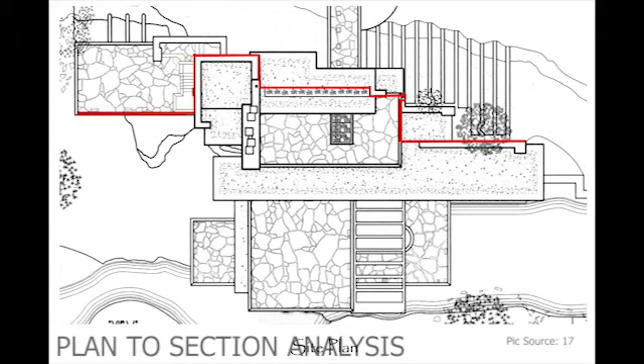While Fallingwater emanates a sense of simplicity through its clean rectangular geometries, deeper architectural analysis reveals the immense complexities that underlie the building's design. Wright employed a variety of formal techniques to create an aspect of discipline within his design and define the unique style that shaped the development of modern architecture.

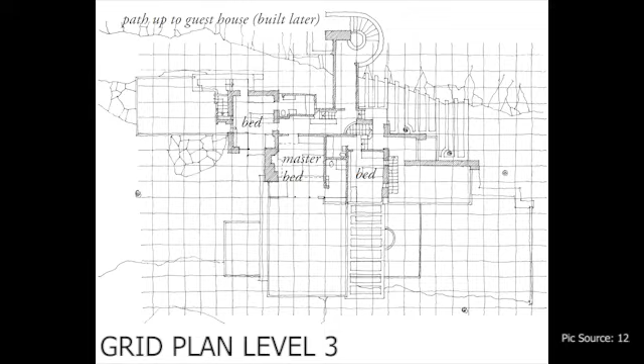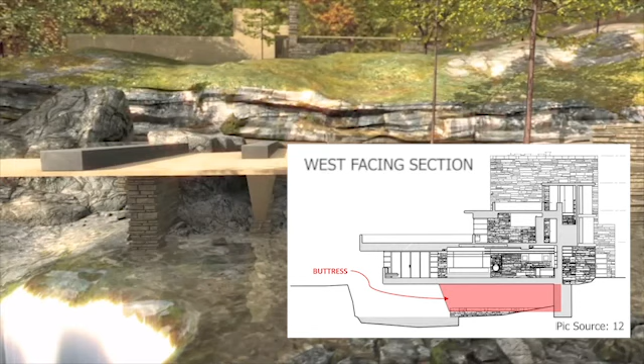The plan is governed by a regular grid, 5 foot by 5 foot, which is oriented to the existing bridge on the site. From a structural perspective, the foundations of the building were formed into the rock ledge beside the River Bear Run, using a combination of locally sourced stone and concrete. To provide the strength required to support the large cantilever overhang of the first and second level balconies, Wright designed 3 large buttress foundations made of reinforced concrete.

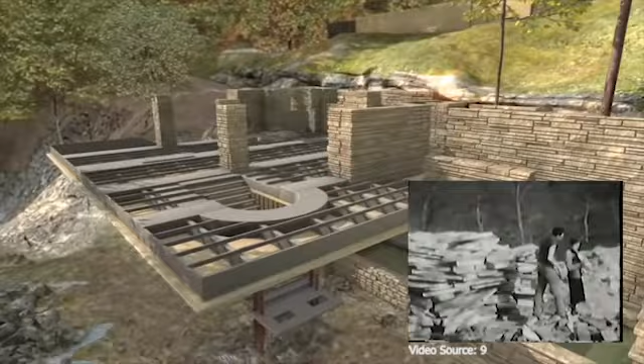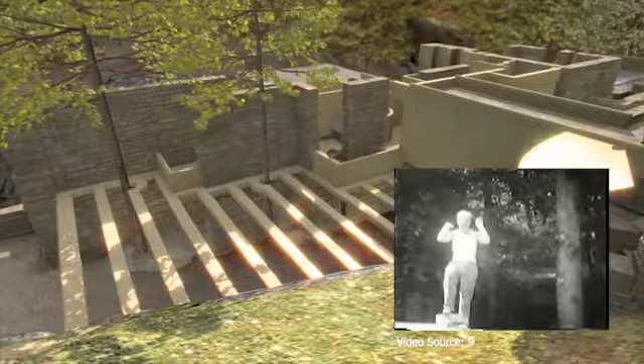The core walls of the building were constructed using the same stone as the foundations, which was sourced from a nearby quarry. The construction of this ambitious design was certainly not simple. The local workers had to be trained how to construct the formwork and concrete reinforcement with a level of precision previously unmatched. The daring cantilever design caused much conflict between Wright, the client, and the contractor, and ultimately resulted in a construction timeline of almost 3 years.

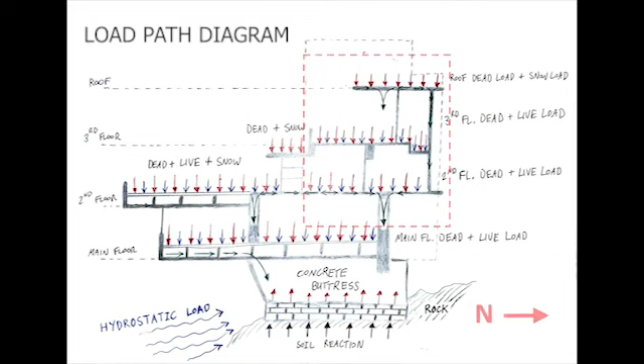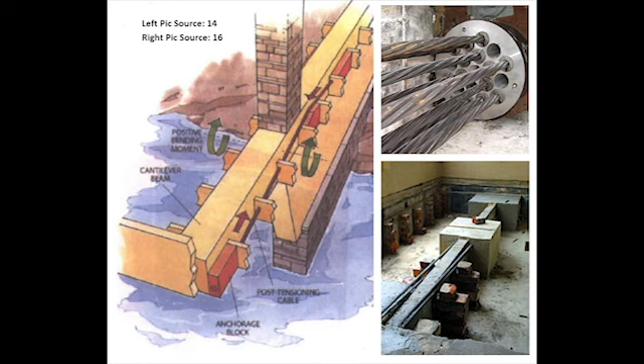The structural solution devised by Wright transfers the gravity loads through the masonry walls and 3 concrete buttresses into the underlying rock ledge. The cantilever system is balanced by the stacking of levels towards the north side of the plan. While the building exhibits some aspects of sustainability, such as its use of local stone and incorporation of a rock ledge as a hearth, its structural sustainability performance has been relatively poor. Several major restoration measures have been carried out on the building to sustain its original form. The largest measure has been the anchoring of the cantilever balcony beams using concealed post-tensioned cables.